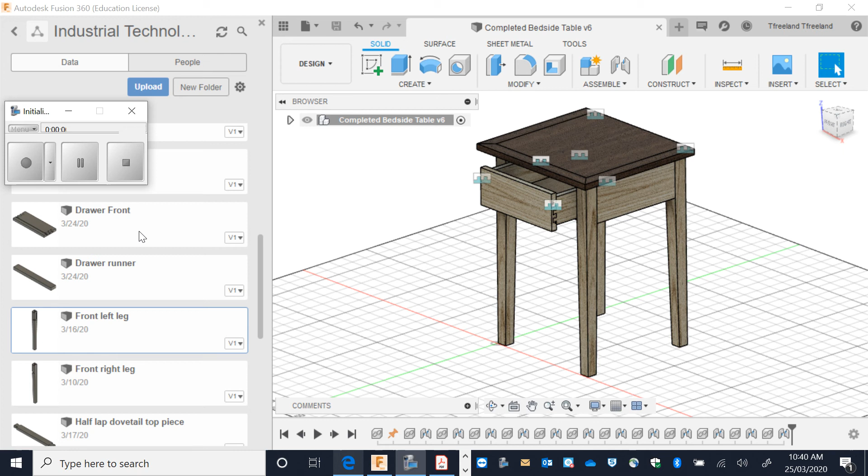Gentlemen, so what we're going to be doing today is we are going to be making some construction drawings from this job. First thing that we're going to do, File, we're going to go New Drawing from Design, open this tab here, make sure it's ISO from scratch, our template, millimeters, it's A3, we go OK.

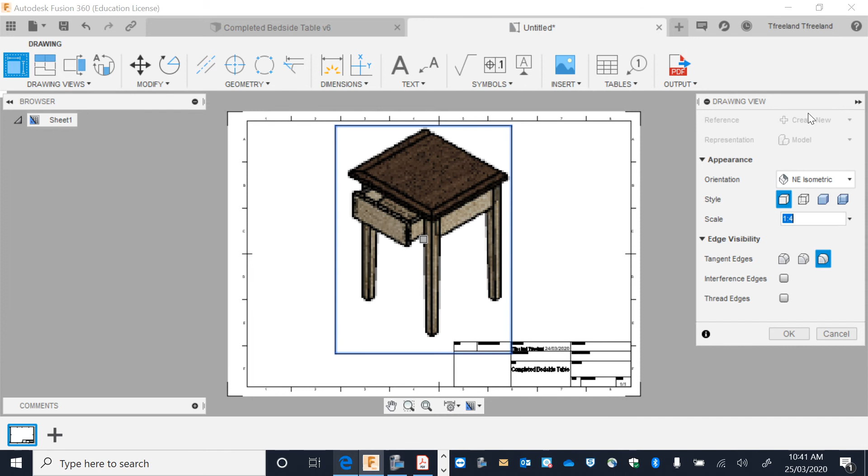That's going to take us to here, and we can see our job, so we want to put our job on a bit of an angle like so. So it's all about finding the right way to put your job, so we'll put it like that. So this one here is going to be just a cover page, so we want it to be a bit bigger than what my other ones will be like.

Click on that. I'm just going to delete this text box. So this is called a title box. I'm just going to click on it like so and delete, and move this down, put that there. Now if I double click this, I can turn the shade back on like so. I'll close, and that's my storage box, my bedside table right there.

What I'm going to do next is I'm going to save this. Save as completed bedside table drawing. We go save. I'm going to go quick add, and I'm just going to click on my projected view. So I've got my front view there. So I'm going to do an orthographical drawing right now.

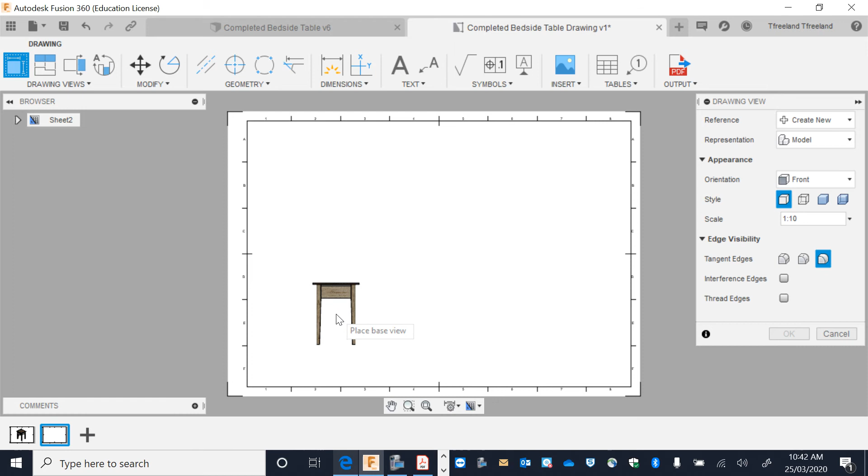So I want to do a few separate views of it. So I've got a side view, got a top view, and I got an isometric. So this is called an orthographic drawing. So orthographic drawing, we've got our front, side, top, and our isometric. So this allows for all of our three views, and I'm going to save that as well.

So in this first sketch I've got these two. What I'm going to do is I'm going to go back to my start, and I'm going to need to do each separate component. So a good way to do it is to start from the top, and we're going to work our way down. So this is going to take a little while. I'm going to go New Drawing from Design, so back left leg. I'm going to keep the title box.

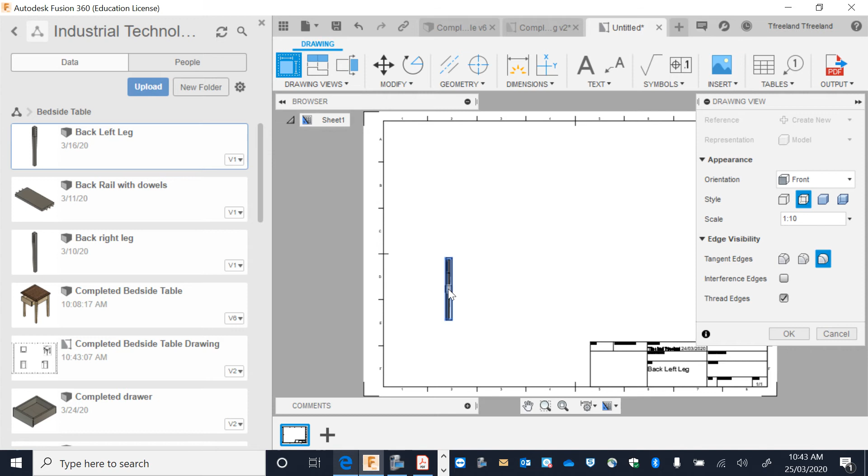So I've got front, got my projected view, I've got side, got top, and then I've got our isometric view there. I'm going to press escape. Go in a little bit. So what I can do, what's on at the moment, they've got construction lines on. We don't really want to have our visible lines on, we just want to have our normal, so we can just see what we need to do.

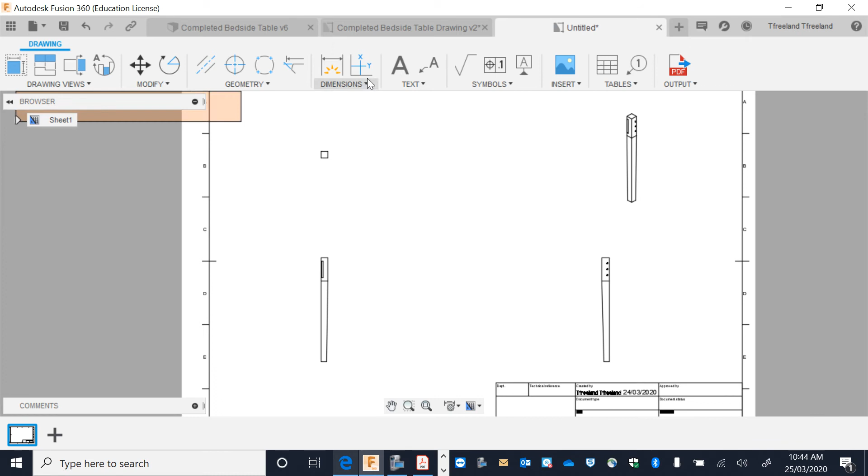If I turn, everything works from here, so I must turn my scale up. So I'm going to turn my scale to about 8, so just to make it look a little bit bigger, and I'll go close. Just close this over here. What I'm going to do next is I'm going to do dimensions. So these dimensions are important because it shows you how wide material is and how big it should be.

Now, when you're doing your measurements, you never double anything up, so you don't mark it twice. Realistically, you should be using all three views to figure out the measurements of everything. So I want to click on the center there, and I'm going to click there, and then that'll tell me that's 35. Go from there to there, that's 140.

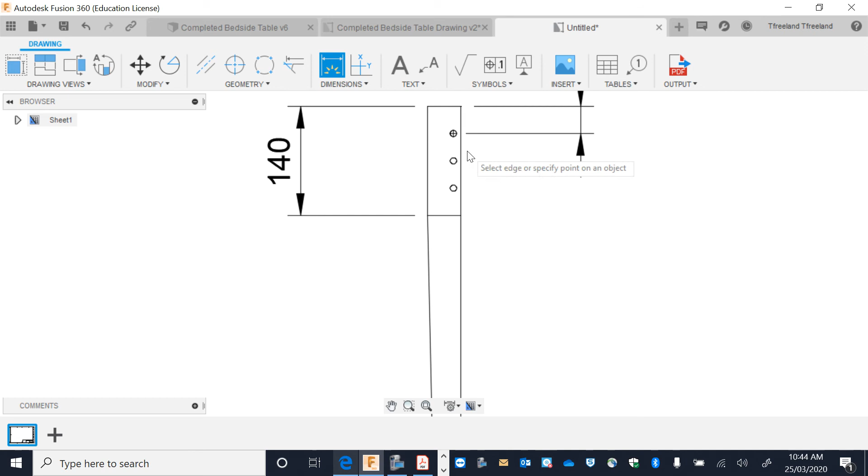And if I want to do our center marks, so we can do radius diameters. So if I click on this, dimensions, radius, and we drag it out like so. Radius of 4, or if we don't want to have radius, we can have diameter, and it says the diameter is 8, which we can put in there too.

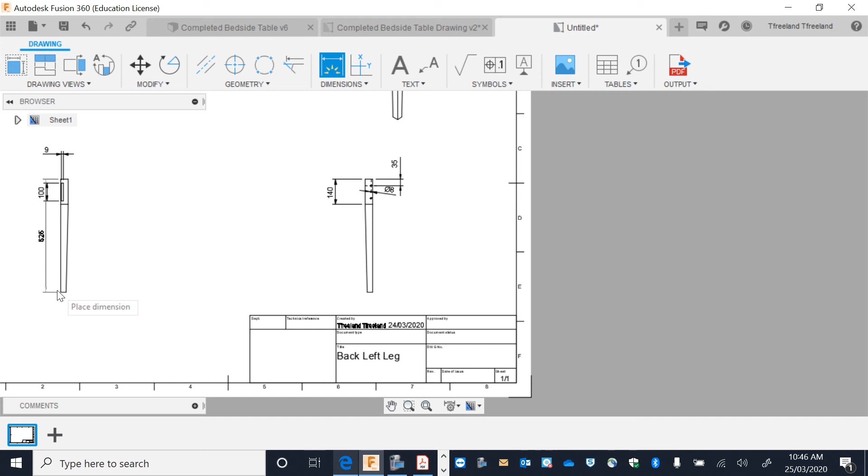Now we should have a dimension for saying how long my leg is, and be sure to do it on the side that doesn't have the taper. Okay, and then we also want to do one from here to here, so it shows you the width, because you'd be able to tell that my job up here is 42, so that makes you assume that you're taking 10 mils off there.

And then we also want to do one down here as well, just to show that it's doubling the sides up. As you can see, some of the measurements overlap, which we don't want. So what I'll have to do is I'll get rid of this 9mm one. And for now I'll get rid of that again, and I'll redraw it with the dimensions.

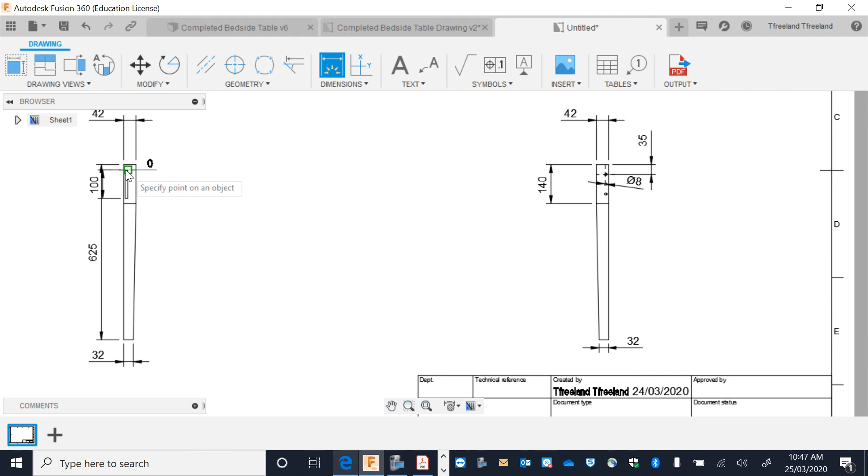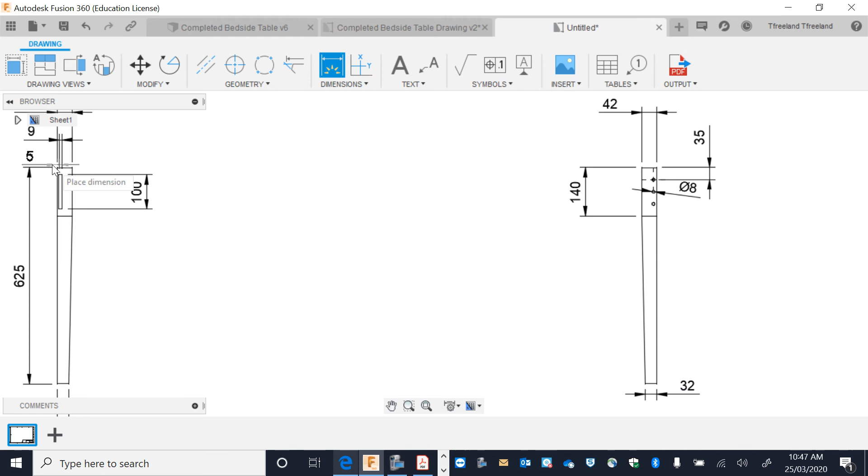And it's also a good idea to potentially get rid of maybe this 100mm, and we put it on the other side, like so. And I also want to do my 5mm, so I might have to just move where my 5mm is going to sit, so we'll sit that like that, just so we can see that it's all like so. I can come back up here, and I don't need to have another 42 there because that's perfect. What we're going to do next is we're going to label our views.

So we've got front view, making sure these are in capitals, because that's the correct way for when we are doing our drawings. It means our drawings are to the code. We have front view here. Okay. This one we've got our front view. We'll do this here. Front view. Making sure when we're realigning it, so we need to move it a little bit so it sits in the center.

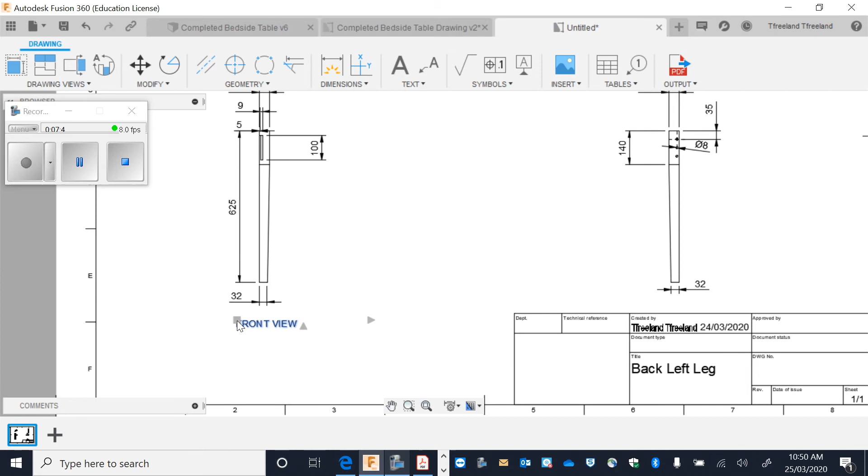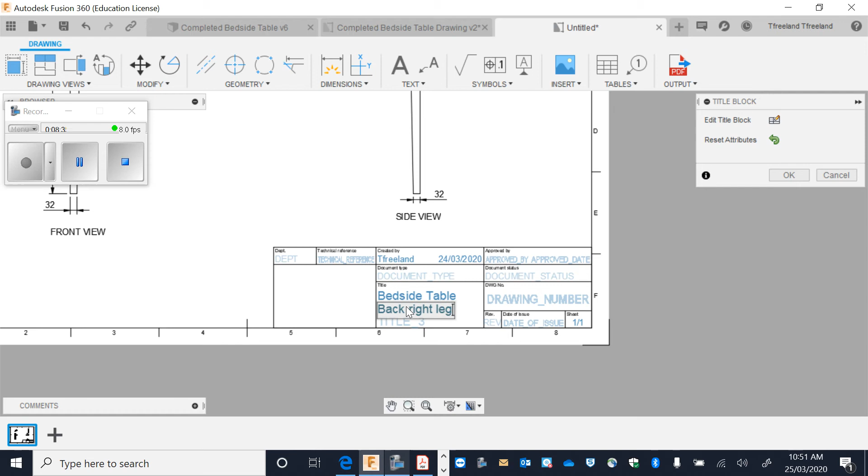As we can see, I need to bring it up a little bit because I need to have that there above, and then do this one vertically under, side view. I'm just going to change my creator name, like so. My title is Bedside, should be all lowercase, Bedside Table. Okay, and then title 2 is going to be back right leg. There we go, okay, and we save that. And I go save. Save.

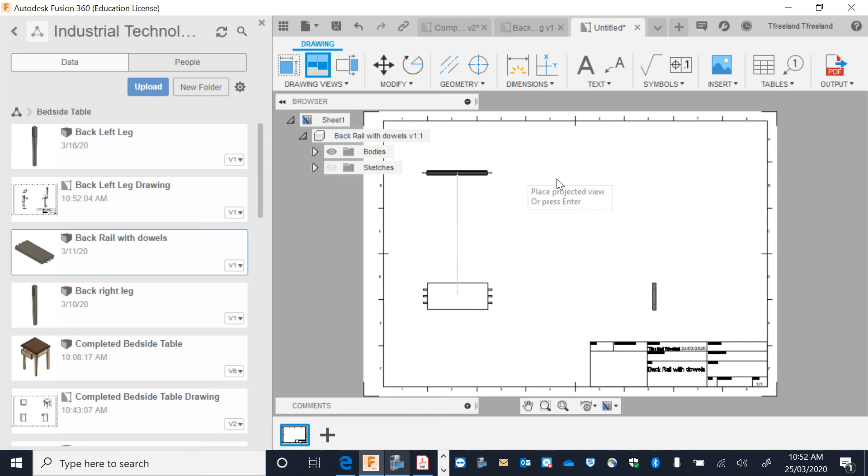Now I'm going to go back to my job, open this up, so I've done my back right. So now I'm going to do my back rail with dowels. I'm going to do new drawing from design. Now, as we can see, the front isn't what I want it to be, so I can change the front around. So I can do maybe the top, because I quite like that more as my front. And then top view, and then my isometric one in the corner, escape. So you should try and get all the scales the same. Drag it in a little bit, drag it up a little bit.

Do our dimensions again. Long one this way, 140. Be worth doing the thickness as well. 8 mils, 19 mils there. Potentially also do the length of the dowels coming out. On this one, I can do the radius, the diameter. We could also do the, so that's 31 mils to there. But it might be a better idea if we did it like so.

When I was marking it out, I actually did it from this angle. Did it from the center and did it to there, as that wouldn't be as confusing. It just tells you where the middle bit is. Now what I want to do is my text boxes. So top, making sure it's capitals, top view, front view, side view.

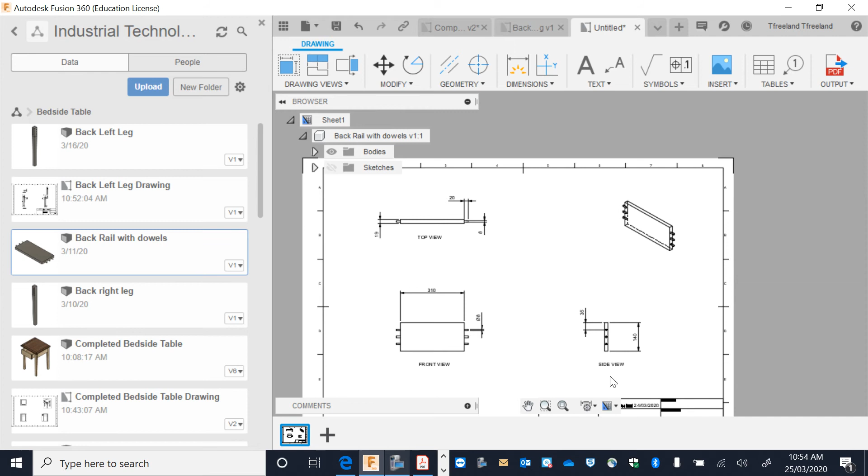I zoom into my box. So I'm just going to copy that, paste that in there. Bedside table. Name. Okay. Save. And we'll save that there. Okay, that's the second one we've done. That should reappear just there. Now, let's do our back right leg. New drawing from design.

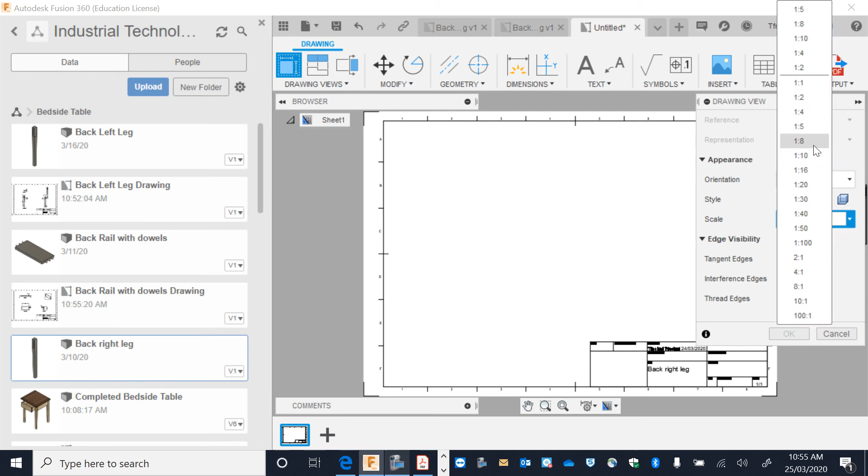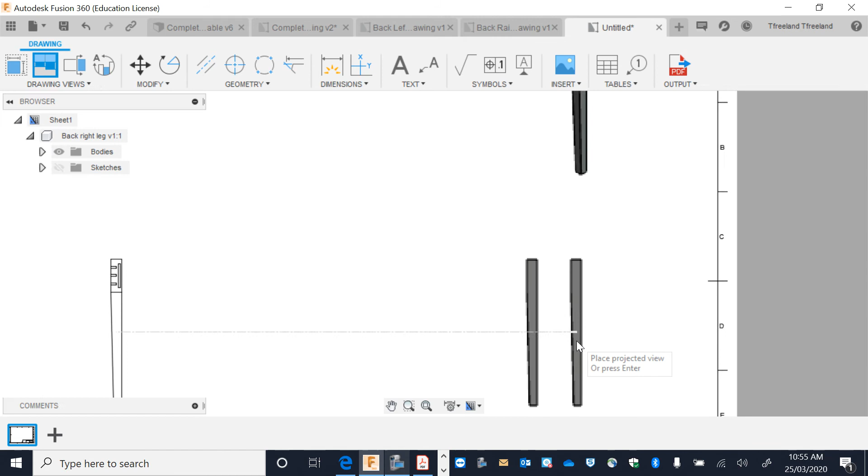Put that leg there. It's 1 to 10. Let's make it 1 to 5. Or 1 to 8 actually. Scale, a little bit bigger. We want to do all of our views. Side, top, isometric. Okay, if we have a look at that, that's not really sitting how it should sit. So as we can see, we've got our construction lines on, so we're going to turn those off just to make it a little bit easier to look at.

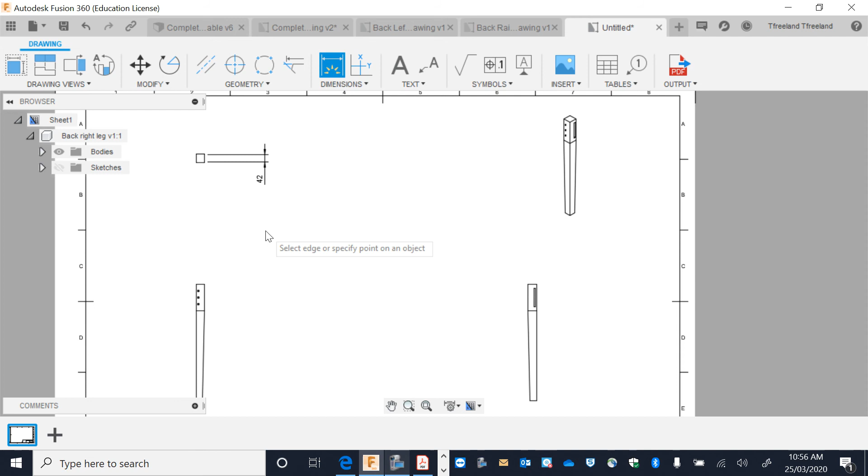But then at the same time, we can see that this one, I can't see the holes in there properly. So we might have to turn it around so I can actually see all the holes in there. And that one's probably the best one for us, because then I can see the dowel holes and I can see the mortise there. Do dimensions. Dimension my top again. Bring it in. We probably won't have to do the 42s on top anymore.

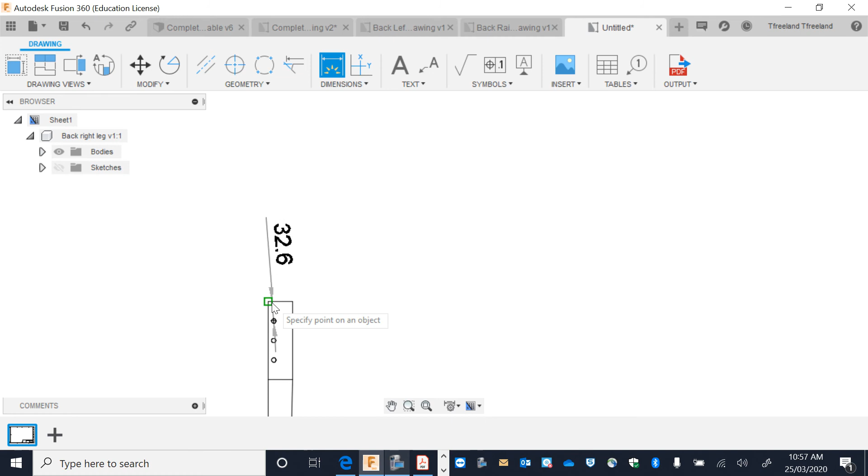And show people that that's 140. That's 100. That's 5. That's 9. And then for this one, I'll do from center to the outside. And we'll also do a dimension. So I might have to do a diameter one there. Like so. We want to make it look a little bit cleaner if we can. Which is good. And we also want one of the actual leg.

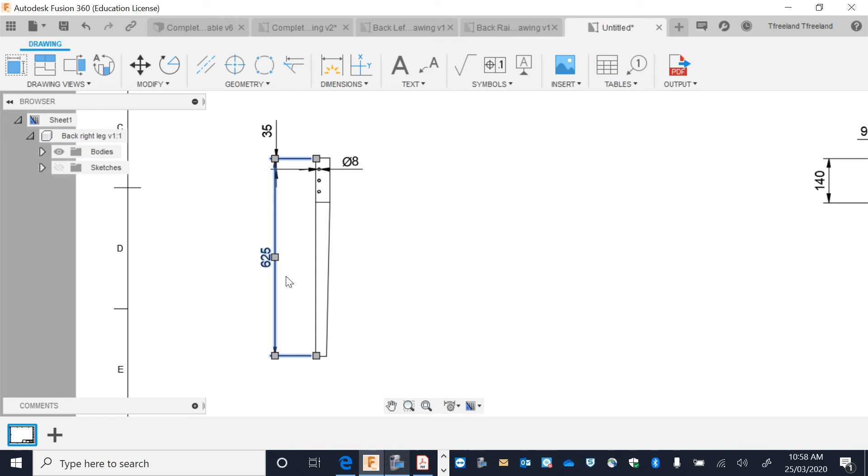Just have it in line just to make it look a little bit cleaner. Do our dimensions down the bottom. As I said, you don't generally double up on dimensions, but I think it's a good idea in this instance because it's a tapered edge. This is our front view. Side view. And we've got our top view up here.

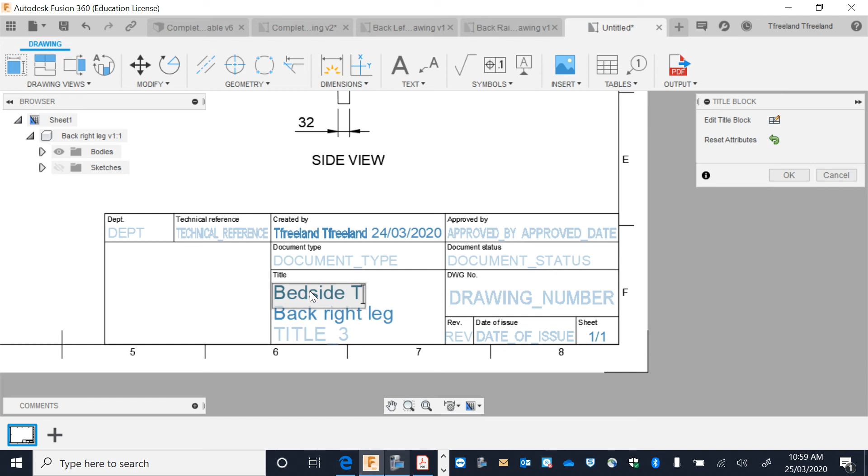We're just going to go to our drawing now, copy and paste that, put in our second title block. Now we're going to write bedside table here. And I'm going to go OK. And we will save. Now I'm going to also do my other leg. I'm going to do my two front legs. So we'll do all of my legs first.

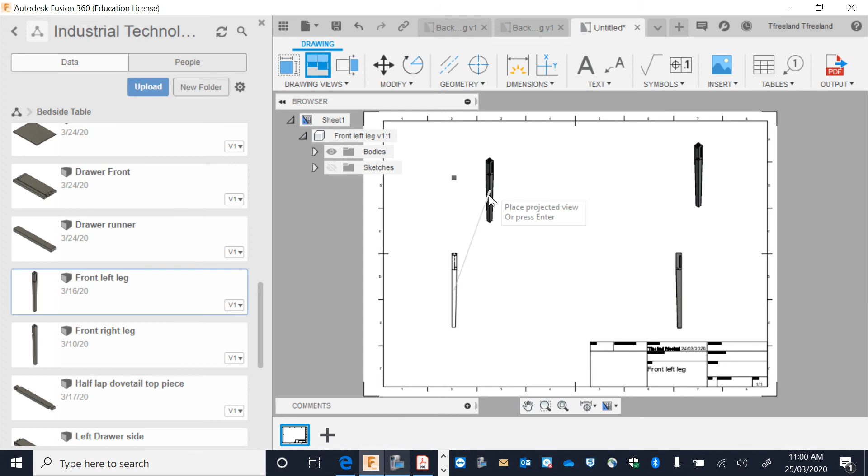Front view. Might do 1 to 8. That's what we're doing for everything else. Okay, and we'll turn off the construction lines.

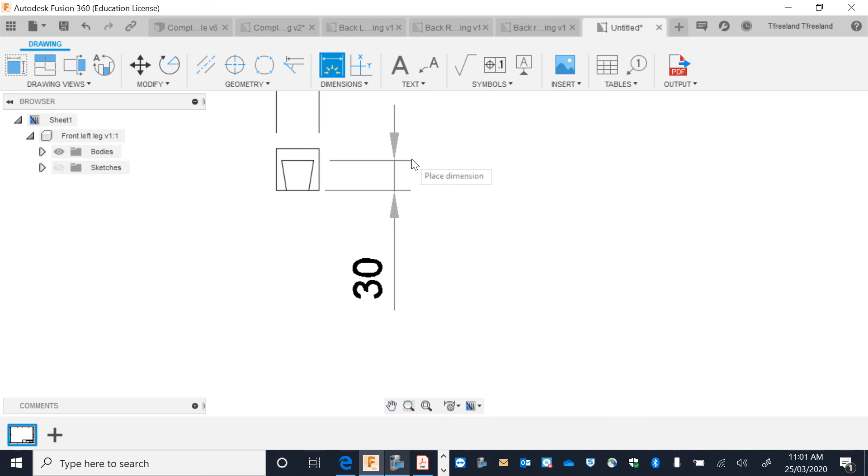Let's put that down there. Let's get it over and done with. Put in my dimensions. Put 30 there. I might get rid of that one. It might be a good idea just to show 5 mils, 10 mils, just from the lines. Because up here what I'll do is the thickness, 19, 10, 19.

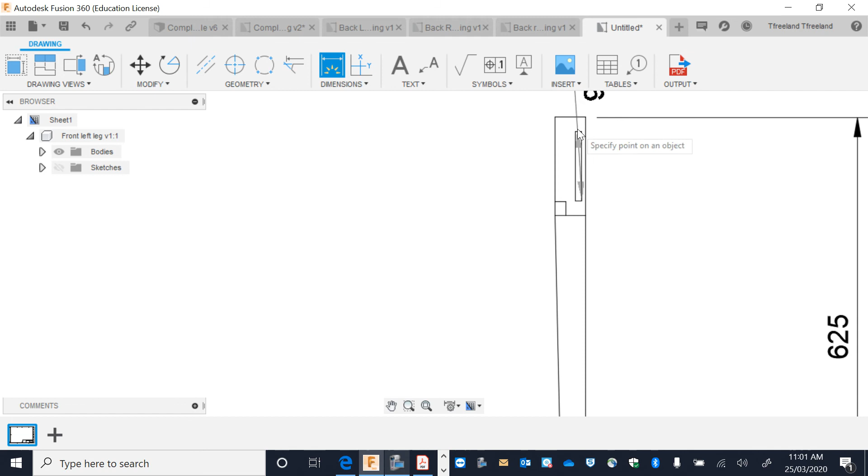We'll show that that's 140 down. Over here, we'll do the dimensions like so. 625. You do your internal, 100. There. 20. Click on dimensions again.

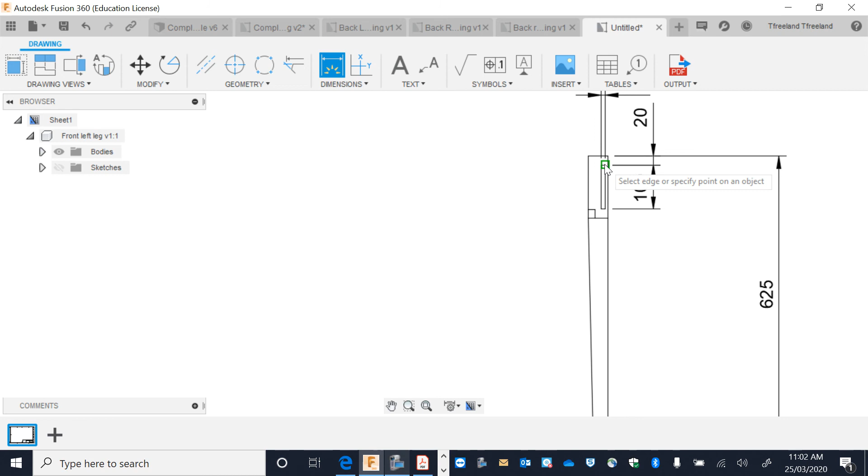I see that, it's a bit hard to read that, which is alright. Do this one here instead maybe. Even those dimensions are a little bit harder to read, so I'll just lower that a little bit. But we should be able to take that off some of our other drawings. So the 4 mils. Put in my text boxes now, so this front view.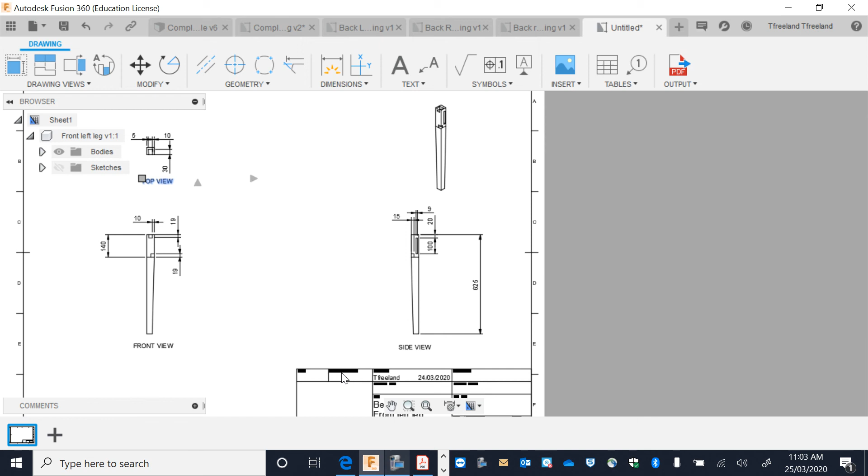Put our side view here. And we put our top view. And we'll save that one now. Save. Okay, that's our left leg. I'm going to go back to my show data. I'll do my front right leg now.

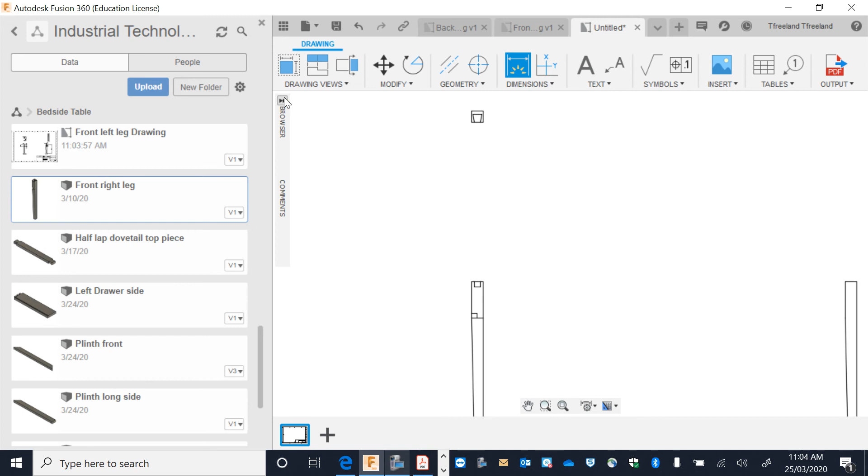New drawing from design. Go to drawing view, turn the visible edges off. Put this one here. Also make sure it's 1:8 scale. That's what I've done for all the others. Do dimensions. 42 wide. We're also going to do from here to there, 30. Show that that's 15.5. We'll get rid of this 42 one again. I don't think it's needed.

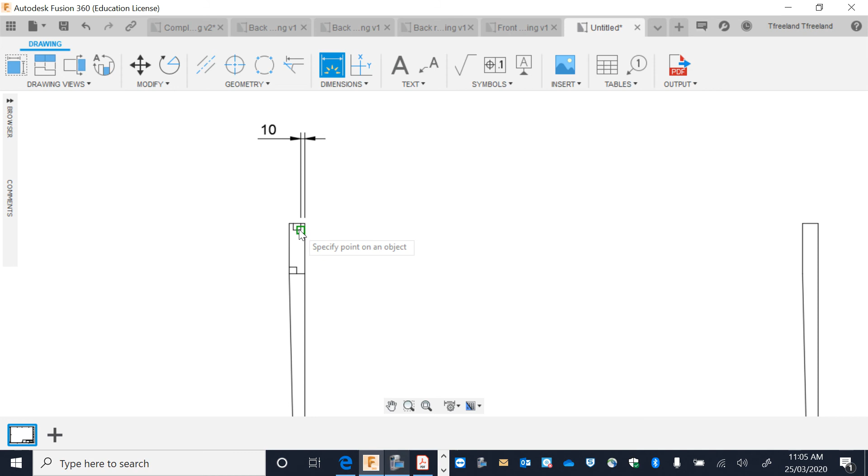Just going to pan down. Go this down here. I'll show the 10 mils is there. So notice, gents, how I'm kind of working around my drawing to show you where the different aspects are, just to make it a little bit easier for you. So we can see that looks a little bit cluttered, so how about we move that, and I put the 140 on this side, and I put the 19 mils on this side, and on this one here.

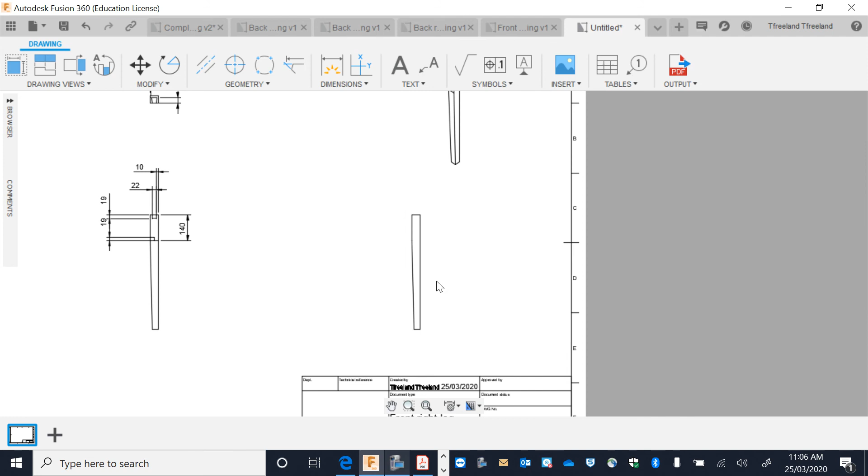As we can see, we actually can't see the housing joint here, which is actually what we need to see. So what I'm going to have to do, get my drawing view open, and, which is quite annoying, I'm going to have to double click on this one, and I might have to go bottom, well, not bottom, sorry, I'll have to go back. I can see it on that side, but I want to be able to see, there we go, close. So I'm going to have to just redo all my drawing again, because I didn't check it properly, but I've got my housing joint there, got my dovetail, and I've got my stopped housing there. So I'll just redo those drawings quickly.

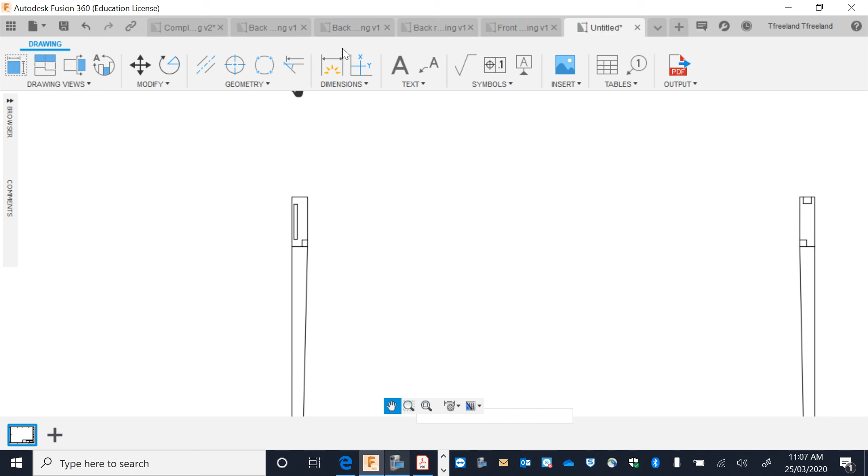It actually probably works out a little bit better that way, because I'm able to do something like that. Put my dimensions. Pull that out. Got our 9. Got our 5. Got our 19. And I'll do my one on the side actually, which is like so.

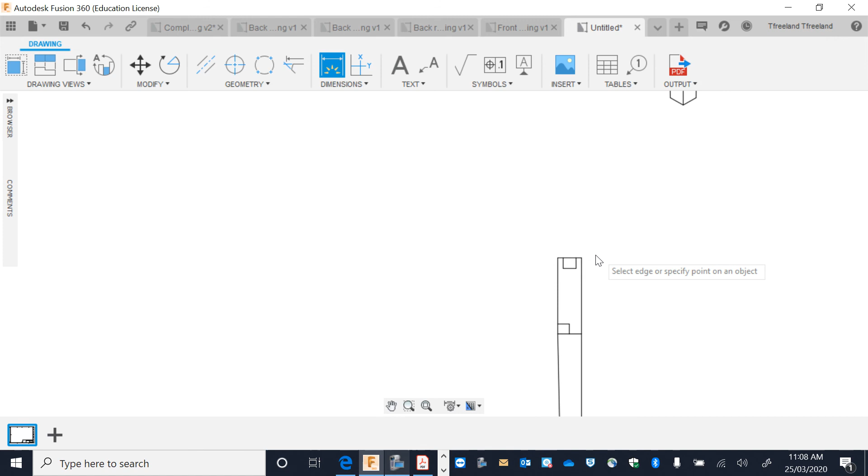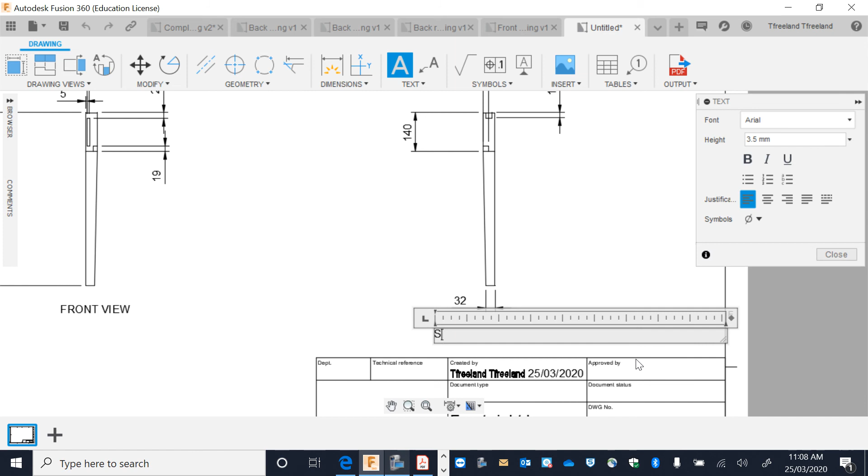I'll actually do my view now as well, front view. Do this one like so. I'm going to show you that's a 19. It's 20. Dimension down the bottom to show that this is 32. And then I'll do my side view. And I'll add it up here. Side view.

Go across. Copy and paste this. We'll delete that. We'll write in bedside table. Yeah, okay. I'm just going to save that. We're going to save that as front right leg drawing, and we'll go save. Now we've done all four of our legs. We've done our back rail. So what we'll do now, we'll do the tenon.

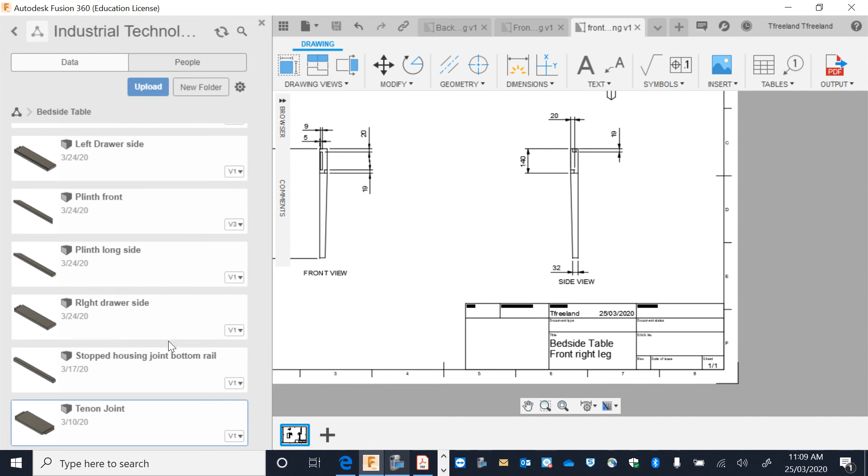New drawing from design. And what I'll do, I'll just insert it in. I'll make this one a little bit bigger to make sure it looks okay. So we've got 0.5 for this one. And I just want to be able to see the front angle, so we might just flip that around to back or bottom. So that's a little bit better, so we can see it properly. We want to have our multiple views like we have before, so isometric, got our side view.

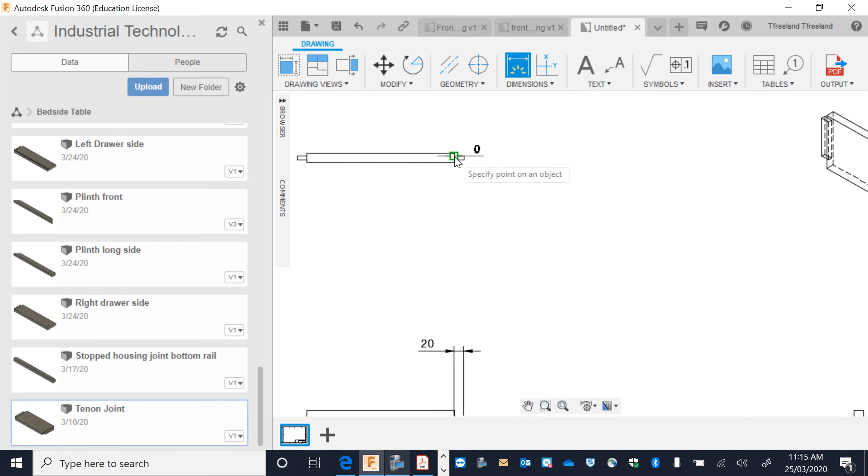Do our dimensions, so our dimensions are a little bit easier for this one. 100 mils here, 20 mils there. We can also do the width of our tenon, 5. Nine. Width of my material there. I also potentially want to do the length of my tenon. So I've done the width of my tenon.

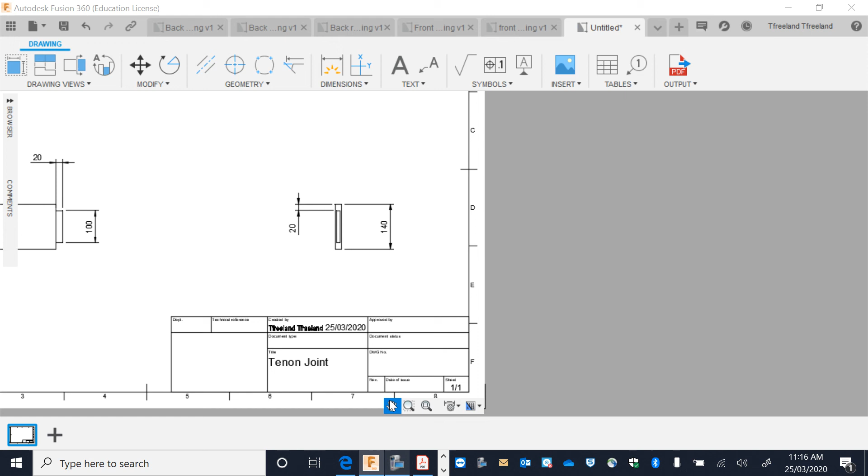Okay, I might also do the space here. How far is it this way? Across. And that should probably be just about all, other than my length. So I want to get the overall length as well. Got 350 there. And we'll write this in as top view.

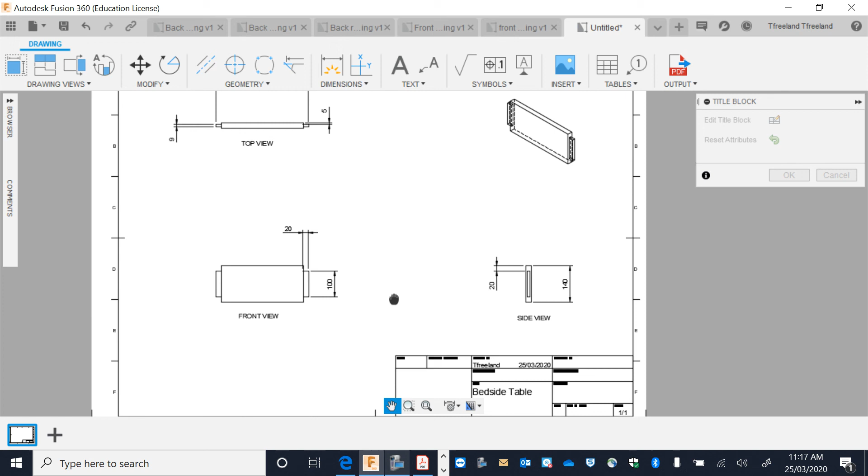Got the one down here as front view. This one as side view. And I'll just fix up my block as well. I'll just copy that, and we'll type in bedside table. Copy that in. Hit OK, and we'll just save that one.

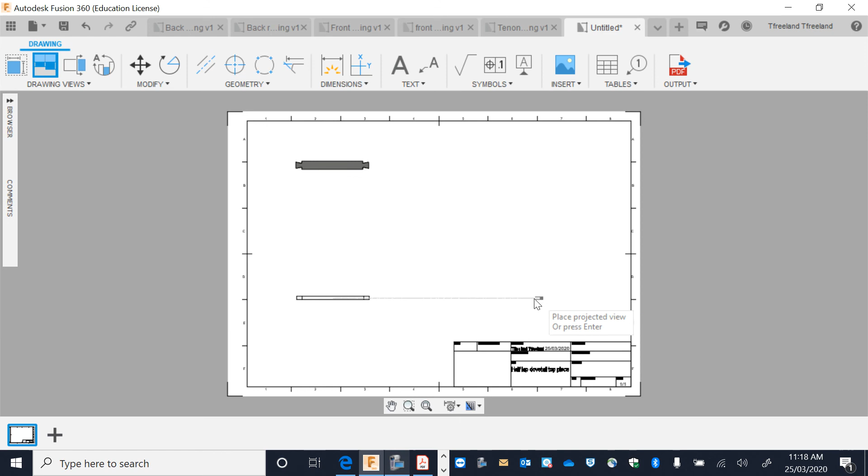So I'm going to go back to my show panel, and I've done the whole carcass effectively now, other than my top half lap dovetail piece, and I need to also do my bottom rail. So I'll do my half lap dovetail first, and then I'll do my bottom rail. Click on this base view so it shows the actual view. Got my front view there, top view, side view, isometric, dimensions. We've got 32 there.

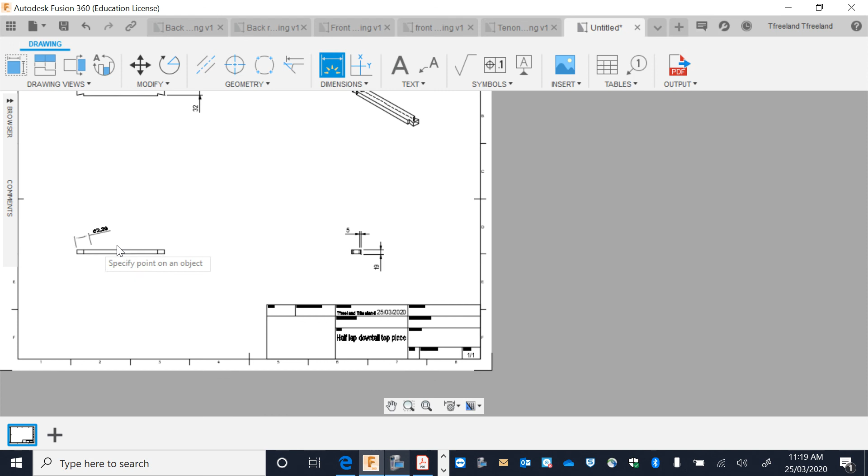And we want to do it to this line here. Sometimes you need to zoom in a little bit more. We want to do this here. So this might be a little bit hard for people to read. So we'll just do that 5. And then we'll do the actual thickness on this one, 19. We'll do the actual length on this one. No more, because it's a little bit harder to read. This one is really where we want to do most of our dimensions for how much we're taking away. So that's 10 mils.

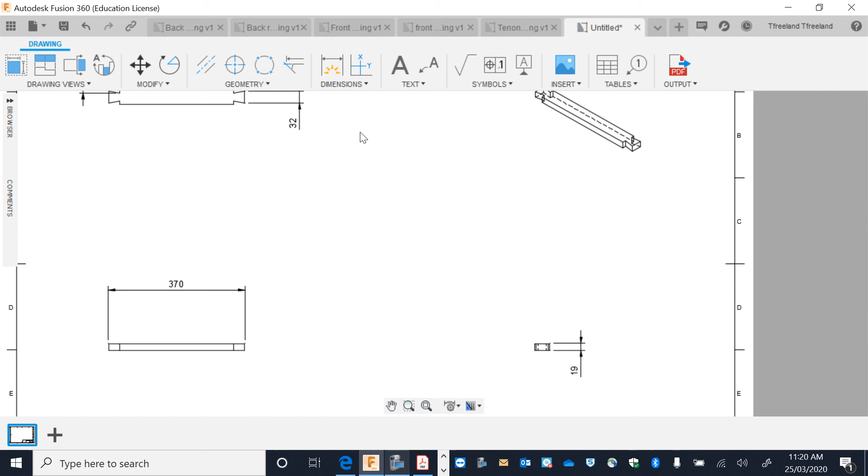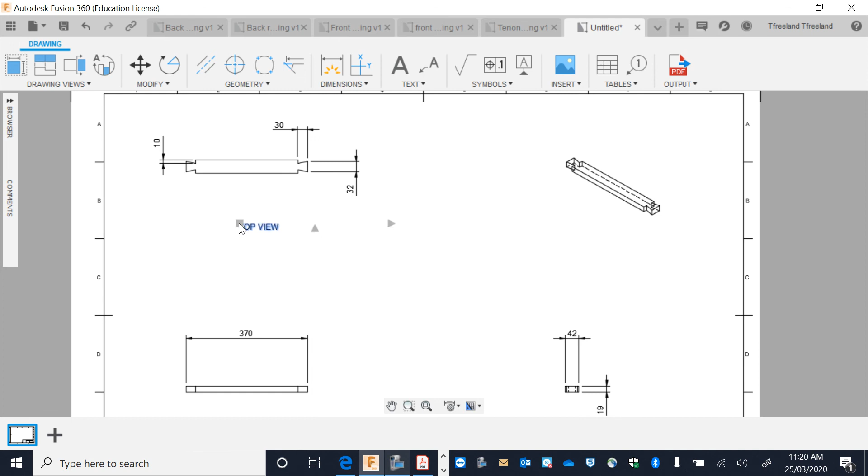So sometimes with these drawings you really need to make it as easy as possible, because you can't always put measurements in there nicely. So you need to have it so they can be in there as best as possible. Just do my block down here. Copy. Bedside table. Save that one there. Okay. And I'll save. Now I just need to do my bottom rail.

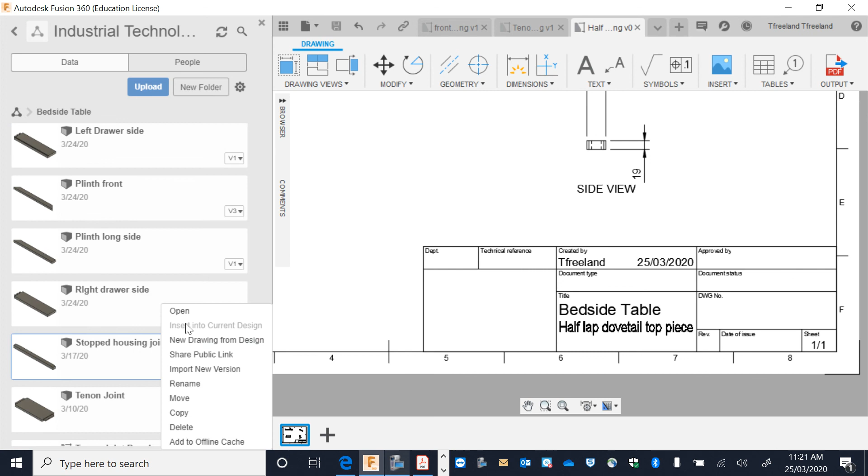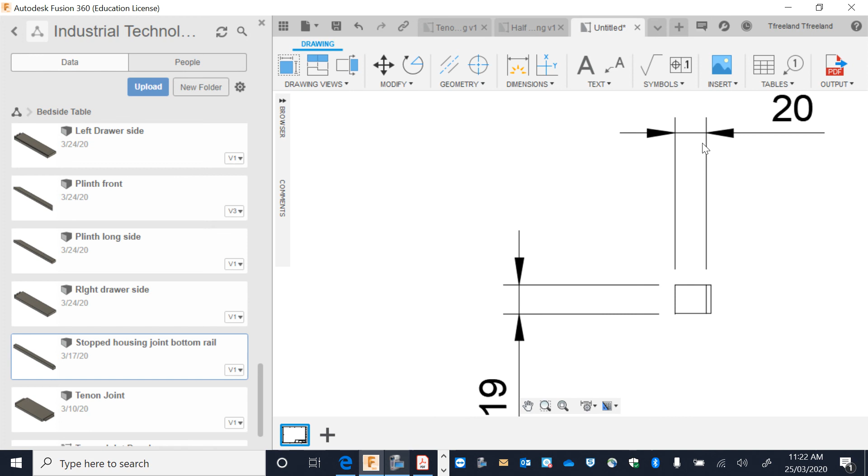Stopped housing bottom rail. Open a new drawing. My front, top, isometric, side view, dimensions, 310, it's 20, making sure that that's actually going the whole way across. It's actually 23.

So I want to have this up here, making sure you know it's 3 mils. And then we also want to have one for how wide, so that's 20. We also want to have one for the depth, actually, how far it should go into the material. 15 mils. Good. Go top view.

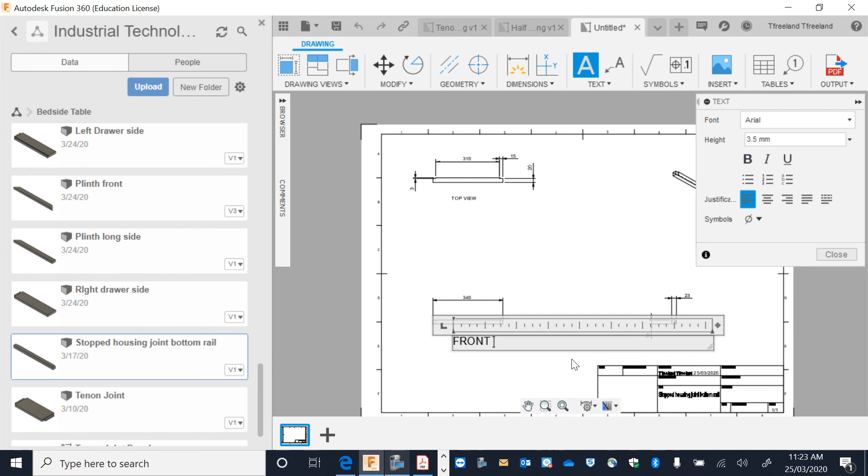Front view. Side view. We'll zoom in over here. Stopped housing joint, I'll just copy that. Paste that there. And we'll type in bedside table again. Okay. And we'll save that one. So what we've just done, we've created the whole carcass. Now we're going to start doing the drawer.

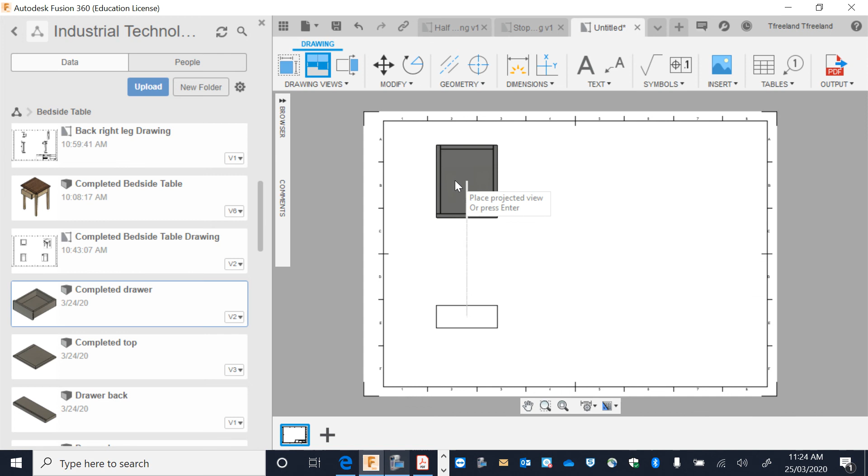So to start off with, I want to do a complete isometric of the drawer, or complete orthogonal drawing of the drawer, with just no measurements on there for the time being. So I'm going to get rid of that drawing block, and I just want to have a complete overview of the drawer with all the different views on there. So we've got our top, isometric, side. Okay, we've got all three views on there. And I'm just going to save that as completed drawer. So I want to have all three.

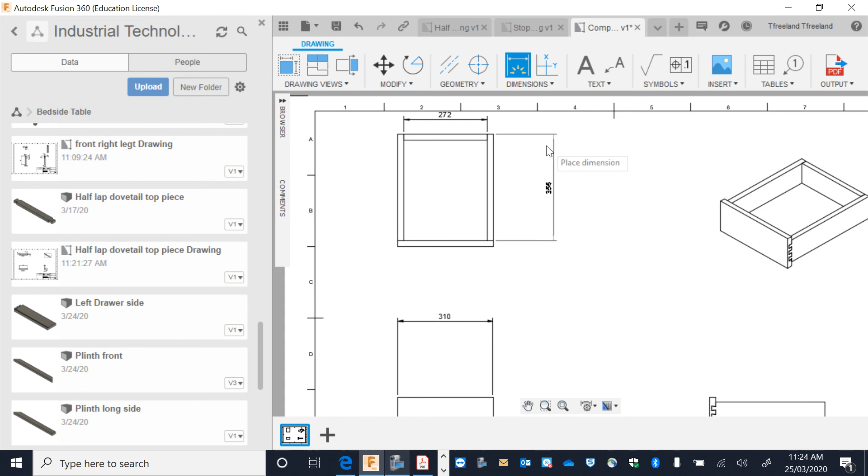What I'm going to do now is we're able to figure out how much each component should be. But just thinking about it, maybe we should add 1 or 2 dimensions just to make it easier for you to understand where certain aspects go. And the dimensions of some joints. And maybe just some material thicknesses. So these are actually very basic dimensions as opposed to what we will do for the remainder. So that's why we don't have a text box. This one here. And I'll save that one.

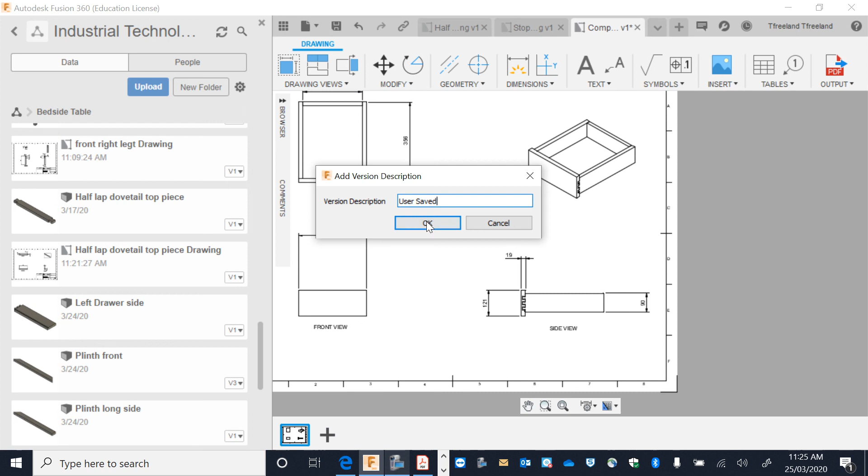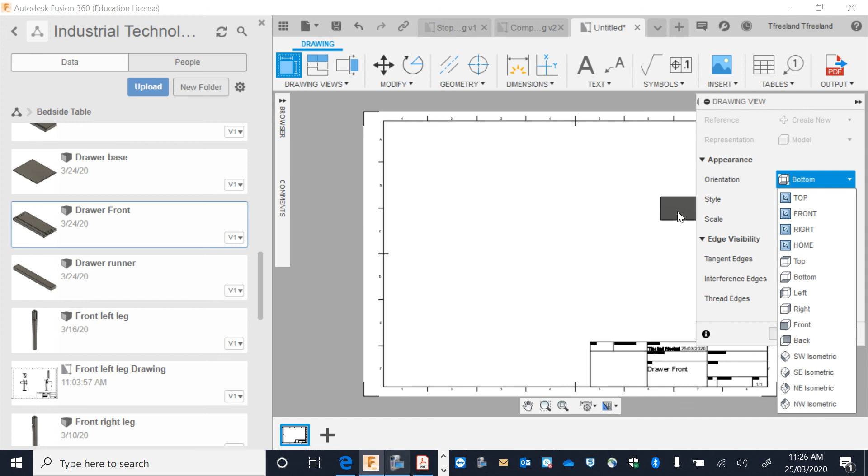What I'm going to do now is we will do one for the drawer front, and I'll do one for both drawer sides. So we do drawer front, new drawing. I'll insert that. So I want to have that so I can actually see it. Maybe bottom view. Yeah, bottom view should be alright. Yeah, I can see it. Okay, as you can see, the drawing lines are coming through, which I don't really want. I'll double click that, turn the shades off. Get a dimension, so dimension how wide that is.

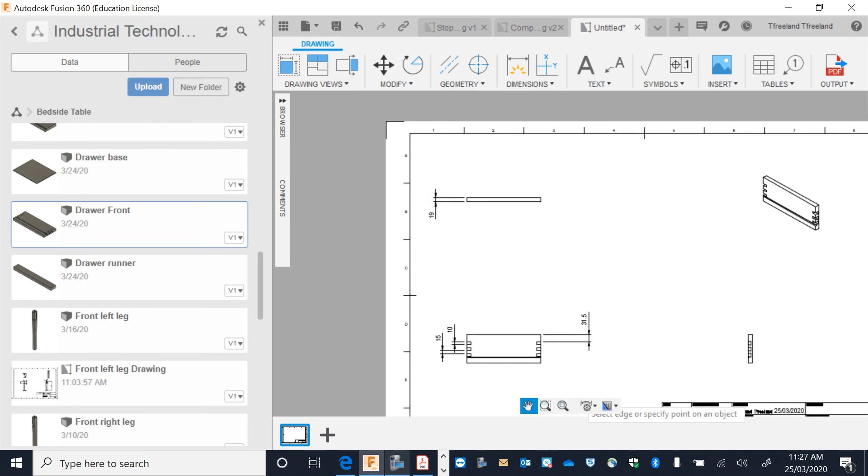But having a look at that again, I actually want to be able to see the dovetail joints in there. So if we go there, I want to be able to see this. I want to be able to see the different measurements that I could potentially add to the dovetail joints. The 15 we might get rid of because I can bring that over here.

Might do one for my groove. Might not be a good idea to do that one there. Maybe I can do it over here. About 5 mils. 22. And for the width as well.

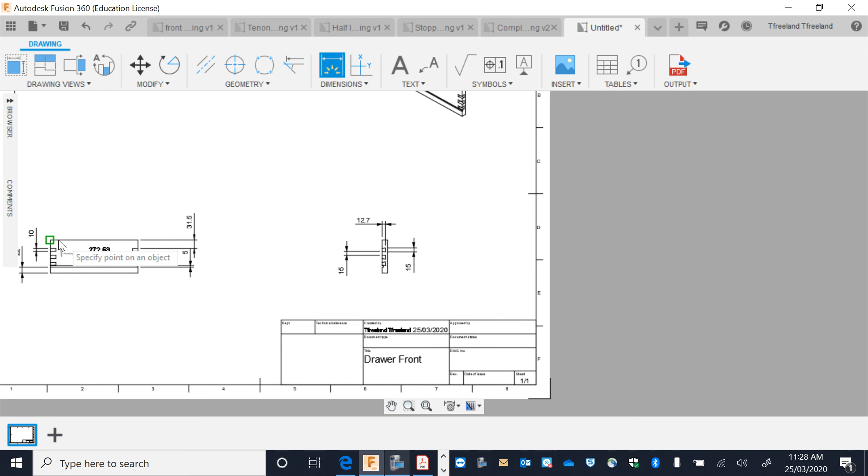I've actually done some of the other dimensions on my material. Top view. Front view. Side view. In Bedside Table. Save that there. Save.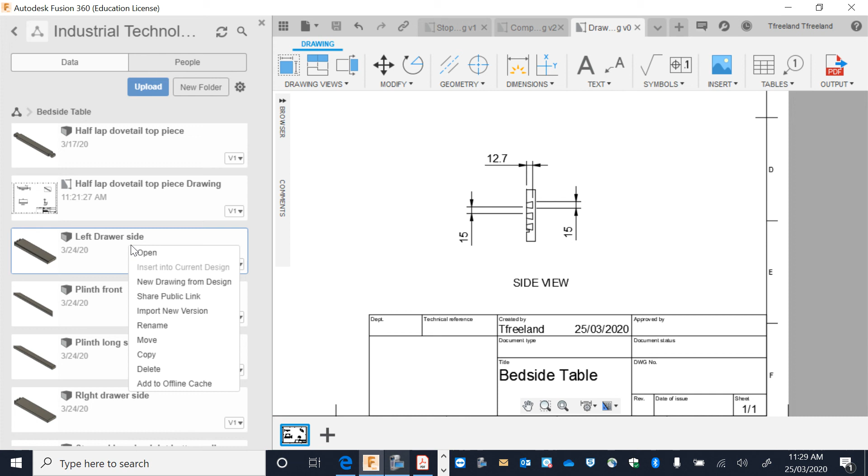Now I'm just going to do one of my sides because the only difference is the housing joints on the other side, and this is basically just to get an understanding of how it looks. So I'm just going to do one of them. So I want to click on here, and I might just change it to like so. Top, side, isometric, and I'll just do my dimensions.

As we can see, the hidden lines are on, which we want to turn off. So this one, I want to do the thickness, width, and then where that joint is. For this, all I can really do is the 12.7 and that one there.

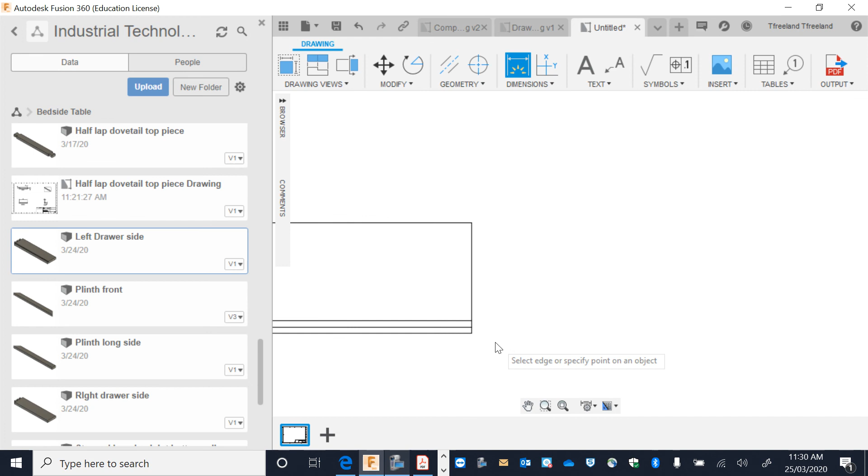Now with this one, I haven't marked out how wide this groove is. So I'm going to mark that out there, and then on this side, I'm basically just going to have to mark out a few things like this down here, 12.5. And I'm going to have to mark out one of them as 10 as well, so I don't have that marked out.

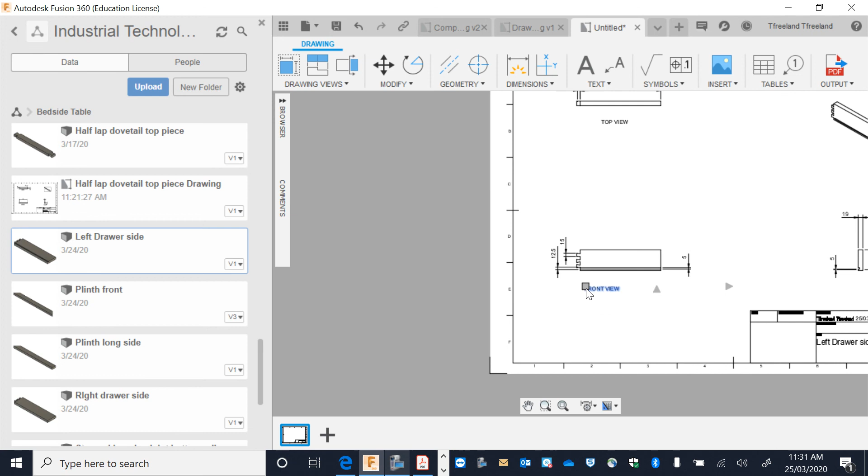What I want to do now is, we've got our top view, making sure it's centered. We've got our front view, making sure it's centered. And we've got our side view.

Remember, copy that, control copy, type in Bedside Table, go to title block 2, enter, me, fix my name up, save, save. Now the last one we're going to do is just the top. New drawing from design.

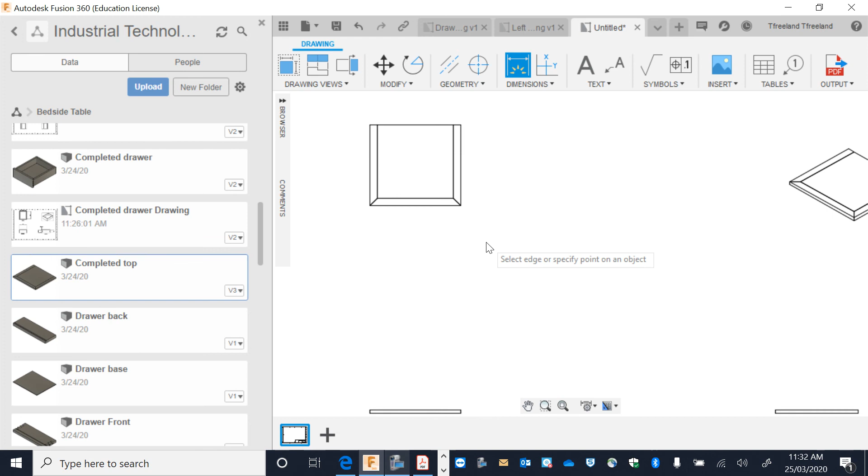So I've got front, side, top, isometric. So most of my dimensions will probably be, and I should also do the thickness of the material as well.

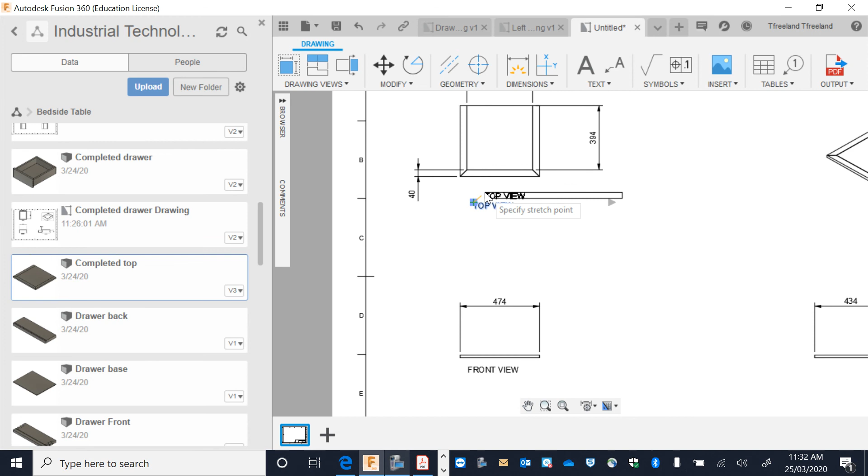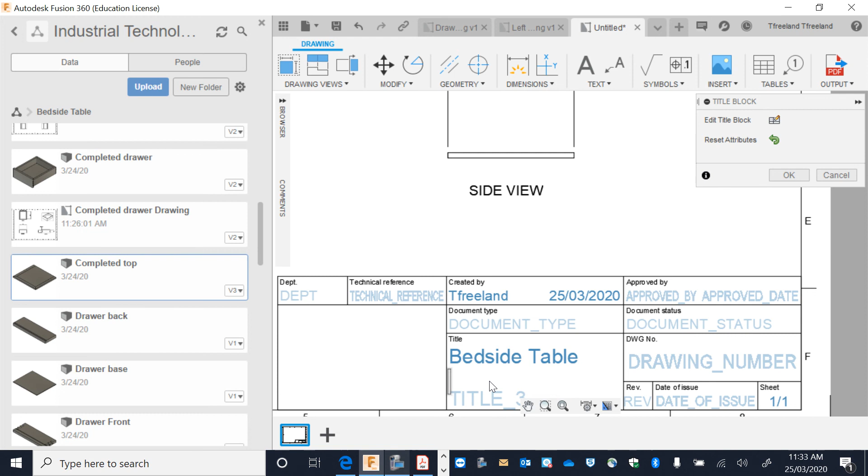Now I'll just do my title block. So I've got top view, front view, move this one up a little bit, side view, go to my title block here, copy, type in Bedside Table, completed top, okay, and we'll save.

Now we've done all of our drawings, and what I've done, I've actually kept them in my tabs. So what I want to do now is output them as a PDF, open PDF, and I'll save them somewhere. So I'm going to save them in a folder on my desktop. Let's create a new folder. Bedside Table plans, so drawings for them. I'm going to save that there.

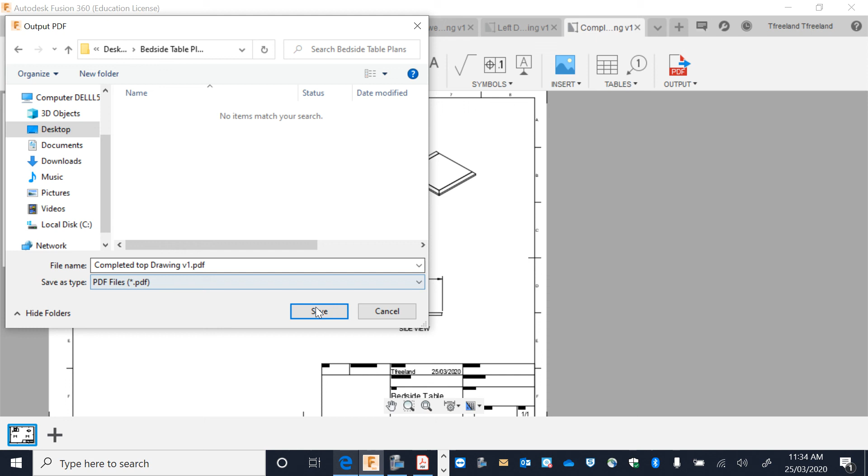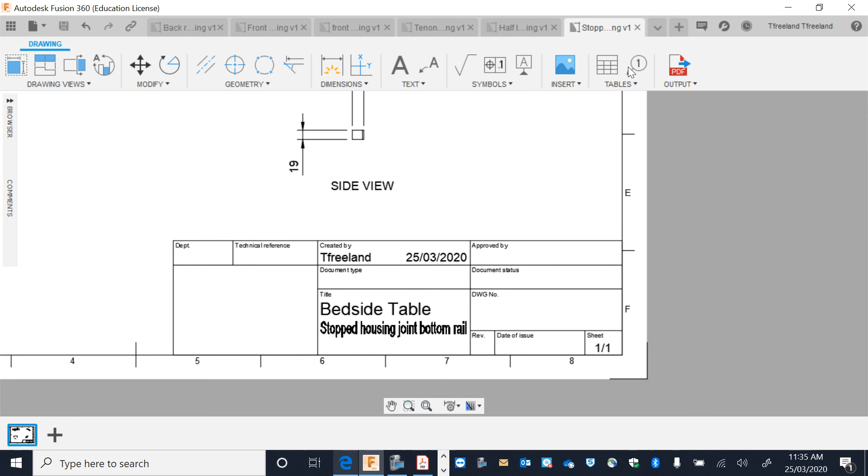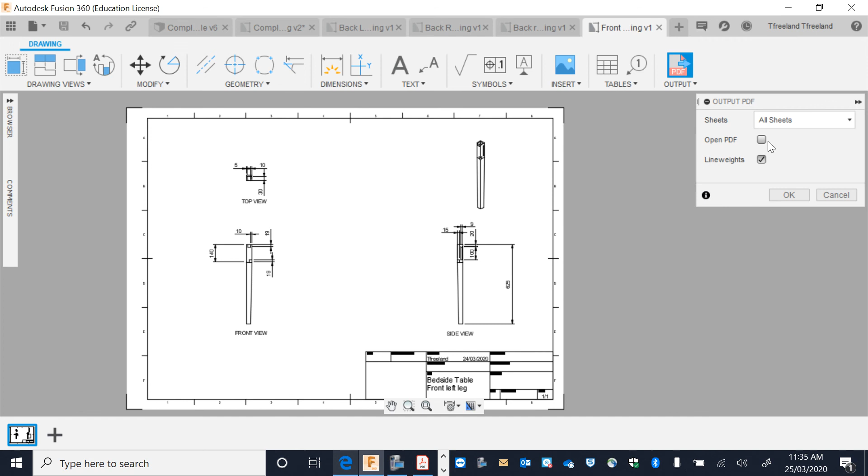Okay, and it comes up in PDF. Now every time you do that, I just want you to close it, because what we need to do next is we're going to be collating all of these documents. So save, saves, we close that, close this one. Do the same thing here, open in PDF, save in that file, we've got everything saved in, close that one, same thing again, we've got our last two here.

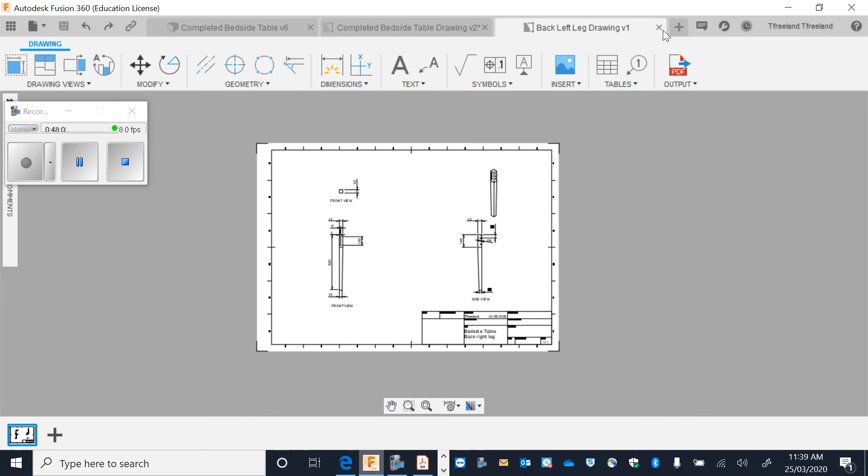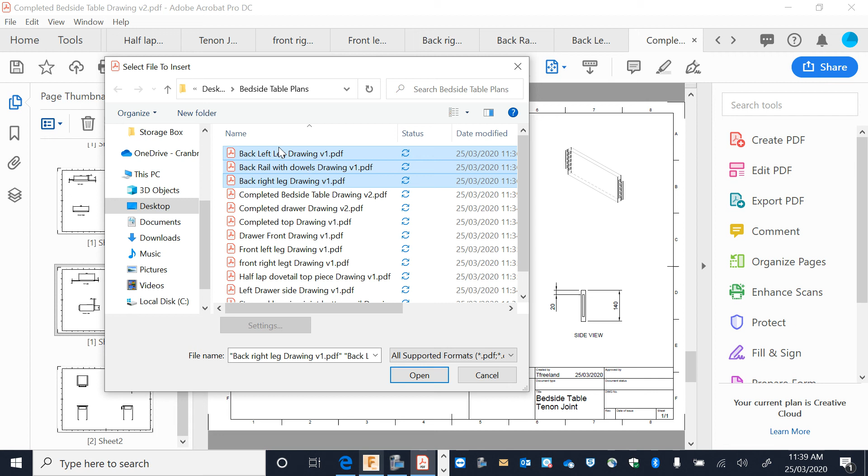So what we're going to do now is, this is the drawing that we want everything in. We've got all of our drawings up here, and we're able to insert pages from a file. If I click on this and I scroll all the way down, or if I scroll up to completed bedside table, I go enter, OK, and if I go up to here again, insert pages, because I know I did it from here, enter, after.

Now what I want to do next is, I actually want to put it in chronological order. So I'm going to move this one all the way to the top. Okay, I'm going to organise my pages like so, so it makes it a lot easier when I'm doing it. So I have my full drawing, I have my legs. So after this one, I should have my tenon joint, because the tenon joint would be the second job I do. So I'm going to move that to the top. So slowly move it up.

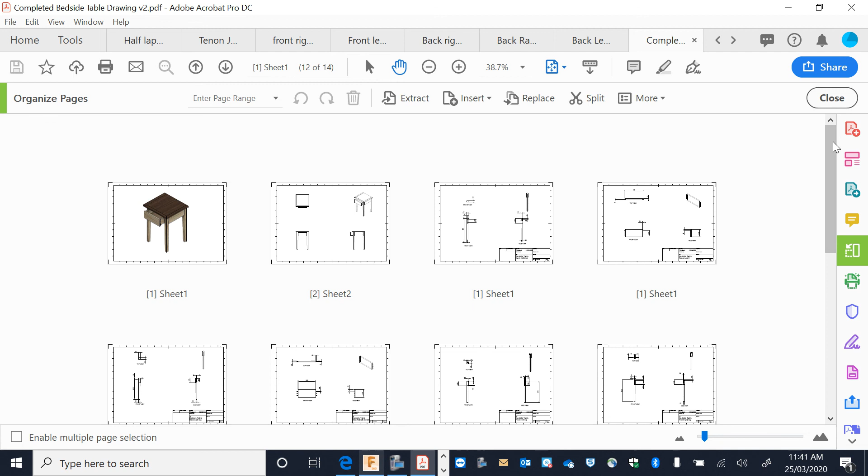And then I have my other leg. I have my dowel leg here. And my other leg, because my rebate will go there. Then after that, I'm going to do my dovetail, and I'll do my housing, then I'll do my drawer, and I'll have my top last. And I will save that as completed bedside table. I can close, and if I have a look, all of my sheets have been collated, and that is my bedside table.